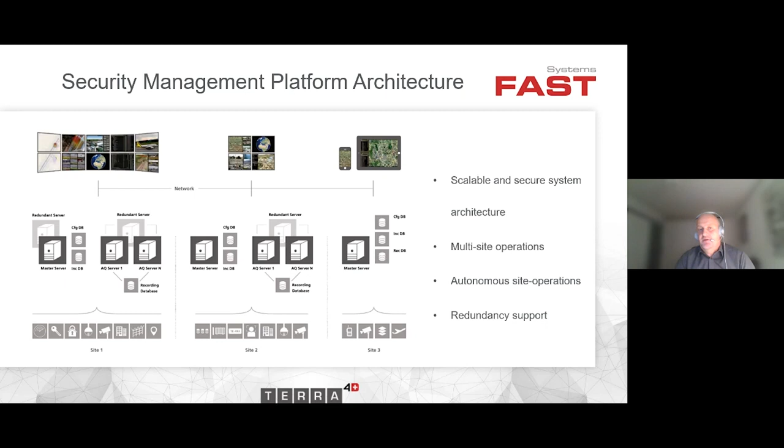We have a lot of great capabilities and features in our platform. My colleague Carsten Schritter will show you this in just 2 or 3 minutes. And something that is really outstanding or differentiating compared to competitive solutions is the georeferenced video, including augmented reality.

We also introduced a big data AI module 2 years ago. That means we have an engine that is continuously crawling the recorded metadata for unusual patterns in order to make the system really smart.

We also have workflow and interactive incident reporting. And since last year, we are actually compliant to an ISO standard, meaning we are able to put into our system already available standard operational procedures, or design new operating procedures, and of course quickly enhance and change these workflow procedures in case something is changing.

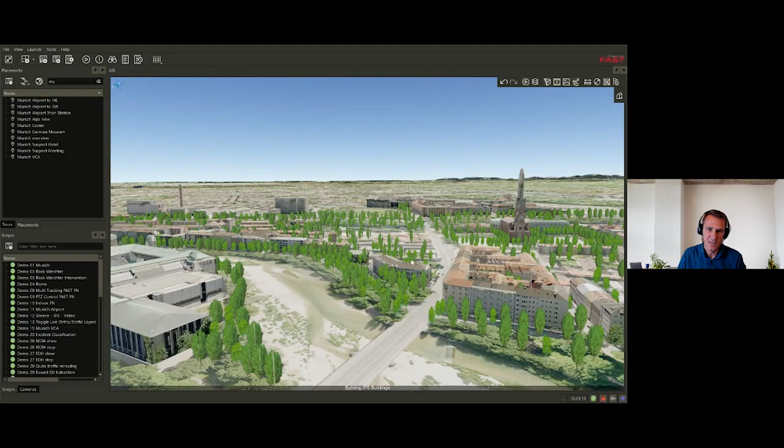So we have in this configuration several scenarios which are coming from projects. For sure, we are using either recorded sequences from the project or just demo data. The first sequence shows a flight into the city of Munich. We are seeing the buildings coming up. We have some vegetation - this is what you know from advanced GIS systems.

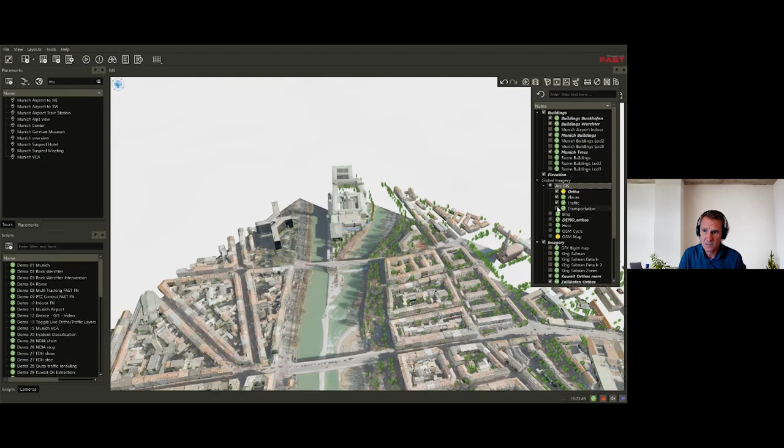We can also switch to other layers, like an OpenStreetMap layer, Bing, or ArcGIS layers, whatever is available in the projects. So the GIS layers can also be a mix of data located on your premise, on your server, or online layers. Especially when it comes to information like live traffic information, which I can show here as well, then we need a live layer.

This takes some time. We are getting this from our ArcGIS server, and after some time, you get here the live traffic information as an additional layer on top of the satellite imagery.

Beside this, we have, for example, the 3D buildings, which are a static layer on our server. This is regarding the GIS model, so these are more or less the static GIS layers.

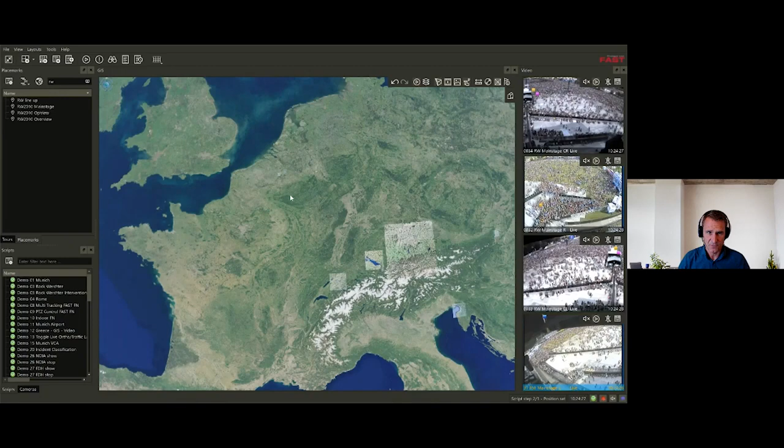Now we are flying into one project example, which is a music festival in Belgium, a crowd event. We immediately get situational awareness. We have the main stage, and we have an integration in this project with video surveillance and Tetra radio devices of police and medical units.

So the cameras are mounted in the 3D model. The video is projected directly into the 3D model, or you can see this in the traditional 2D view on the right side.

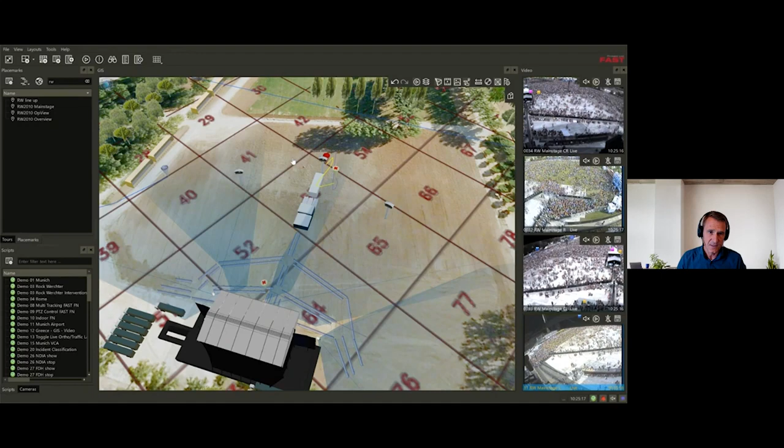You can also turn off the video, and then you see the tracks and the current position of the recorded units in the system for the police and medical units. So you have situational awareness - you understand where your units are.

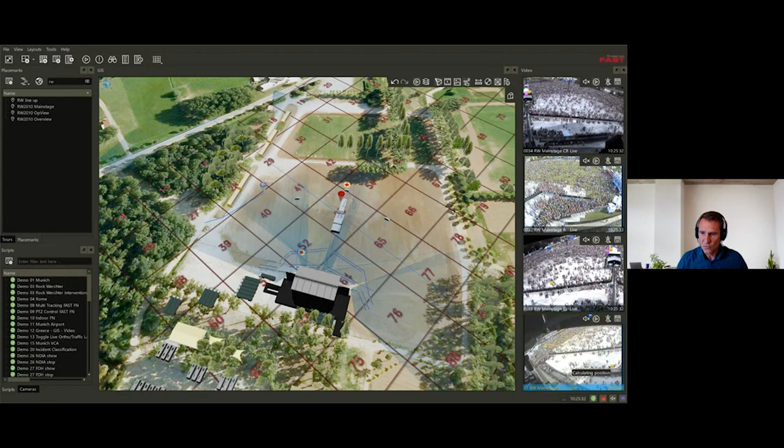You also, when you move the mouse over the video - and I do this in the lower right corner of the image - you get for every video pixel the longitude and latitude. This is what we call georeferenced video.

This means with a simple click in the video, the map flies to the location and marks it on the map. So we have a relation between a video pixel and the 3D GIS, the real world location.

Why is this important? I will show you an example directly exported from this project. So we see here other surveillance cameras, and we have the map view here on top.

One use case here was that the operator was looking at the video and can now trigger an incident directly from the video in the background. Remember, for this fireplace the young guys are doing, we have the coordinates based on our georeferenced video, so we can create now an intervention.

This means we want to send security forces to the incident location. So now we have triggered the start of this workflow for this intervention for the operator. The location is marked on the map.

I can now start my intervention, select the closest units, which I cannot do now because I don't have live units there in the field. So I go to the next step in my workflow, and we are simulating now that security forces are approaching the location, which we did in this project live.

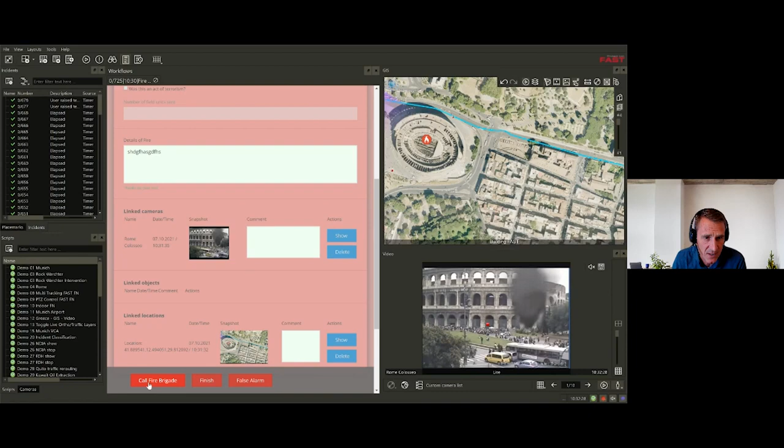So I started filling the incident report. Once I'm sure there is really a fire, I can call the fire brigade, which is for sure a serious action. So this means before I collected all the information, it's saved to my incident.

I call the fire brigade, and given that we have an interface to the fire brigade cars, we will see now the vehicles approaching the incident location.

So as an operator, I can just follow up, use my map navigation, keep an eye on the situation, and once everything is solved, I have now the option to finish my incident. So the situation is cleared and the system is switching back to normal surveillance mode.

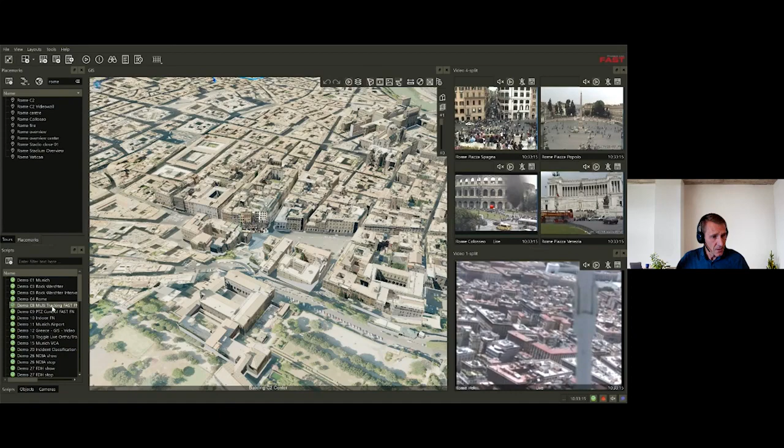So this was one other example. Now I'm switching to some live cameras we have at our office building in Germany. So far, these were stored sequences in the system.

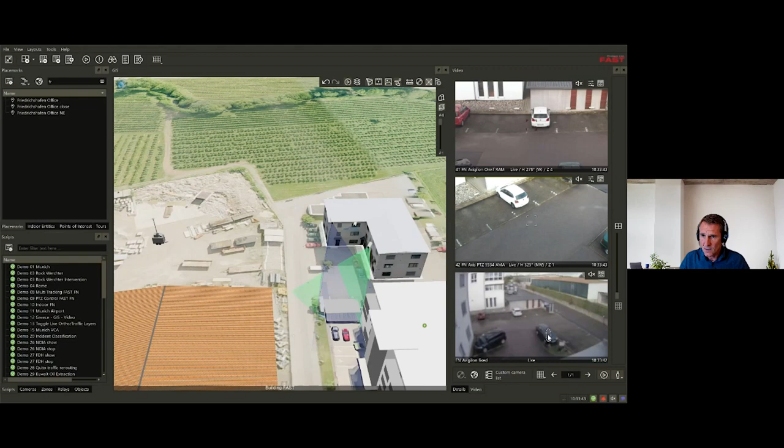So we see here on the right side 2 PTZ cameras and a fixed camera, and we have our office building where we see the mounting points for the cameras, the 3 cameras here at the building. So to give you an example here, how we control the PTZ cameras efficiently through the georeferenced approach.

I can use a fixed camera, click on an object in the image, like for example this car, and both PTZ cameras will center on the car. I can use a zoom rectangle to zoom to the number plate of the car, and I can read the number plate.

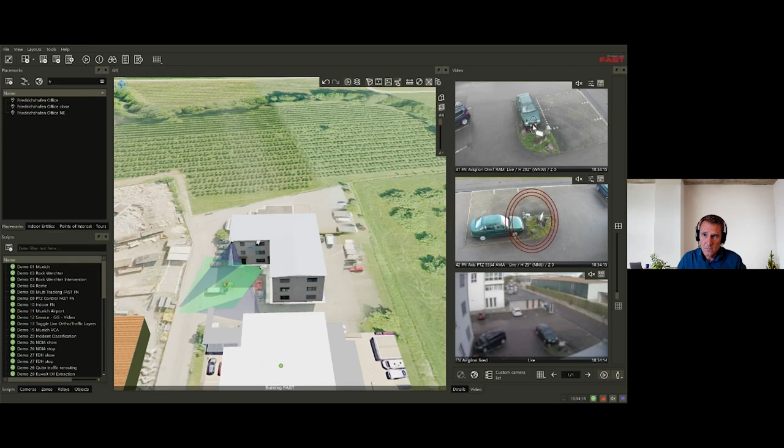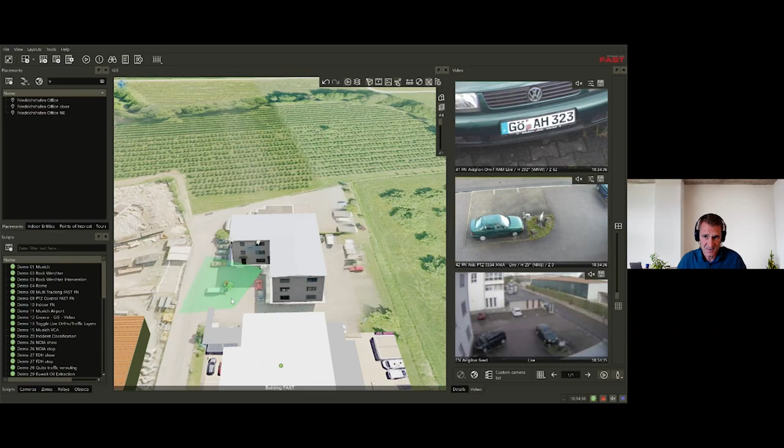Sorry, this was maybe a bit fast. And this is what we call latency compensated PTZ camera control, because what we are doing in the background is we send longitude, latitude to our georeferenced PTZ camera, and the camera is going to this object.

This is even more on the map, by the way. You see that the field of view of the cameras is changing. So when I use the zoom, for example, then I get a narrower field of view for this PTZ camera.

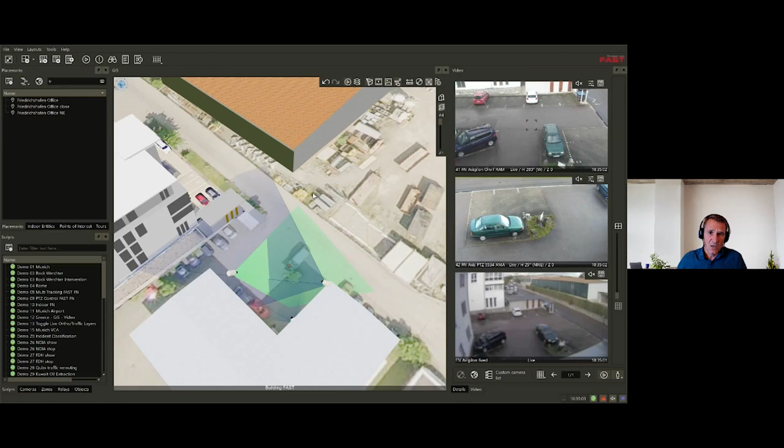And I can use also the map to center the camera onto different targets. So I use, for example, the multi-control on the map function for the PTZ cameras. Now I can click the corner of this building. Both cameras immediately go onto the target, and in the video you get the target centered to the camera.

So especially when you have wide area network connections, maybe to remote sites, this is very helpful, because you just tell the camera the target coordinate and then you wait for the image. You don't have to use a joystick, which is complicated when you have more than, let's say, 300 to 400 milliseconds of latency in your video.

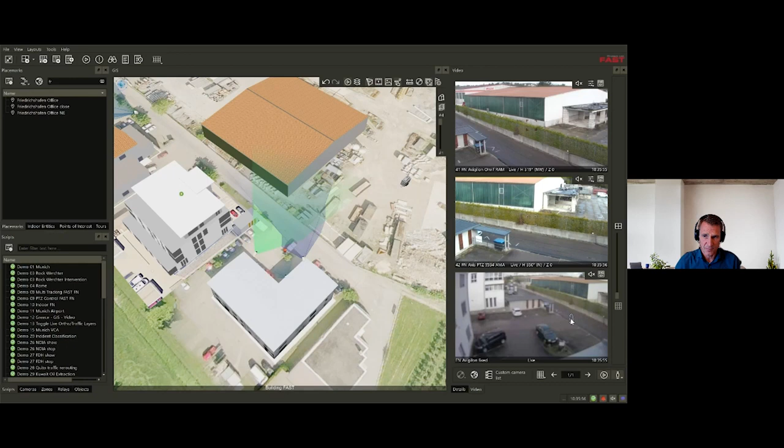And for sure, also for the PTZ cameras, I get the longitude and latitude for the video pixels, and I can do all the operations we did before with the city of Rome example.

Now let's go inside the building. So far we have seen outdoor applications, and I want to show you now some insides of the building.

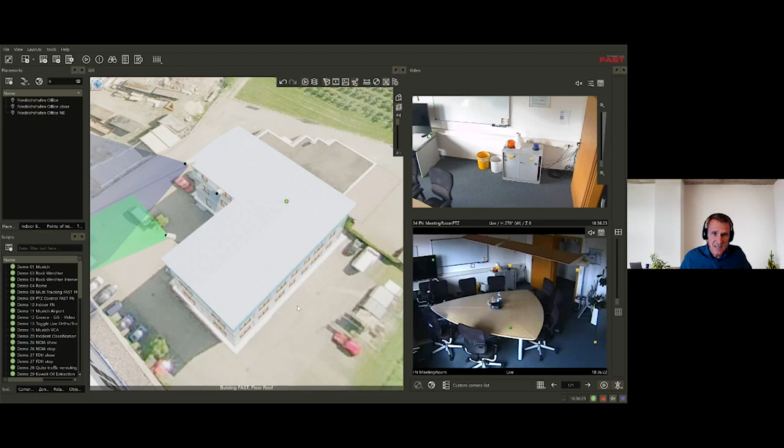So we have two cameras now on the right side, which are showing our meeting room. I can use here, for example, the building slider to open and close the building floor by floor to see the devices which are in the different floors. You see we have some smoke detectors here, a fire extinguisher device, and the two cameras in the meeting room. These are the cameras we see on the right side now.

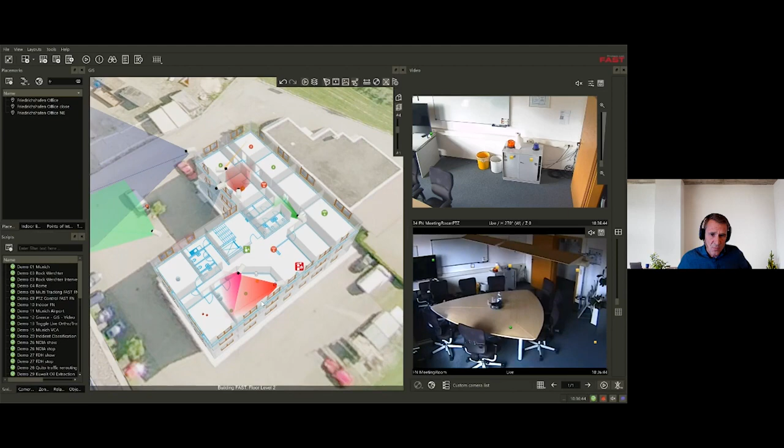In this room, I have some features coming from a building management system. For example, I can trigger the room light. I can do this directly in the video, because this is the augmented reality view, as Bernd mentioned in his presentation. So all the items which are in the current field of view of a camera are automatically displayed as an augmented reality view in the camera.

So I can trigger the room light, and I get now the feedback in the camera that the room light was turned on. The same I can do from the map. I have here the orange flashlight. I switch it on, I get the feedback immediately with the icon. And in the video, you see the flashing light here. Obviously, we have some delay in the video for the PTZ camera. Now it's coming, but the picture rate is relatively low.

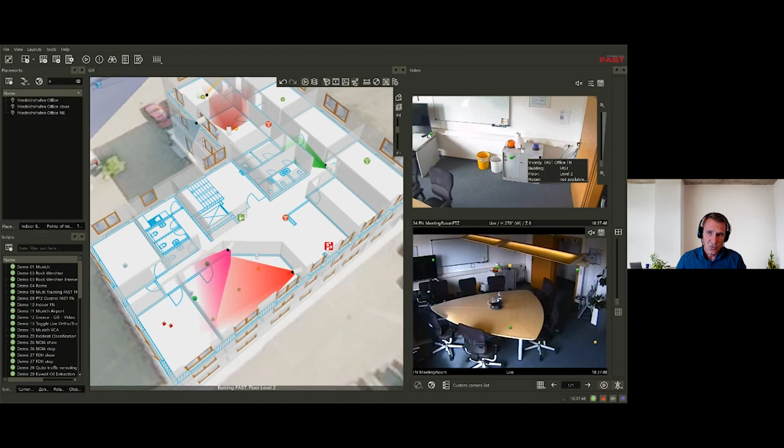So it's quite easy for the operator to control all the items from the video overlay or from the map. It's up to his decision. I can turn off the field of view of the cameras to have a better visibility on the icons. Switch off the room light.

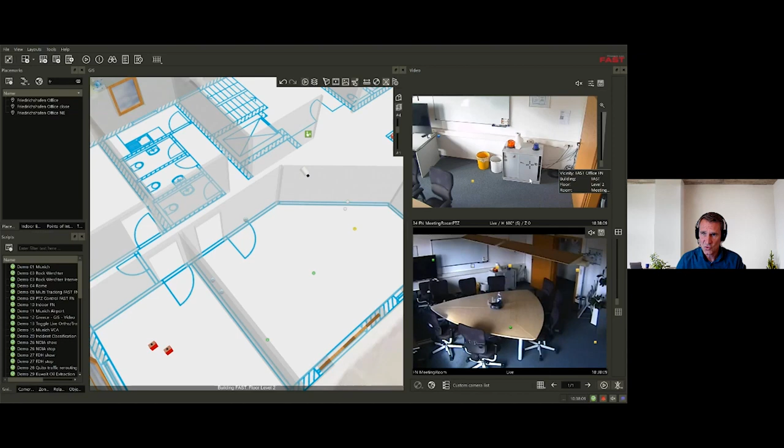The preset positions for my PTZ cameras are also showing all the items which are in line of sight of the PTZ camera. So you don't need to program. The pink one here is my PTZ camera. You don't need to program all the presets. When you have an I/O device or an access control point, a card reader or something in line of sight of the camera, then it will automatically pop up here in the preset list.

And when I go to the orange flashlight, for example, the camera will go to this location and you have it centered to your camera. So this is quite helpful in terms of saving work during the configuration.

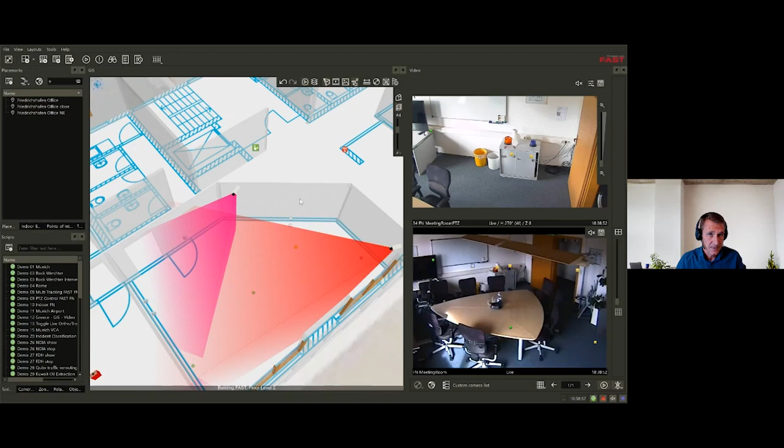Yeah, this was for the building. Then I'm switching to the next scenario, a totally different application, which is border protection. So we are talking about airborne surveillance now, and the fact that we have a 3D GIS system is very important there, because when we look at mobile cameras in general, not only airborne, also cameras mounted to vehicles, for example, or UAVs, then it becomes very important to understand what we see in the video image.

I think this application is clear, and it's quite simple for the operator. He has the visualization on the screen, and we are defining the workflows of the different actions he can take. But he has, in this case, the very important situational awareness.

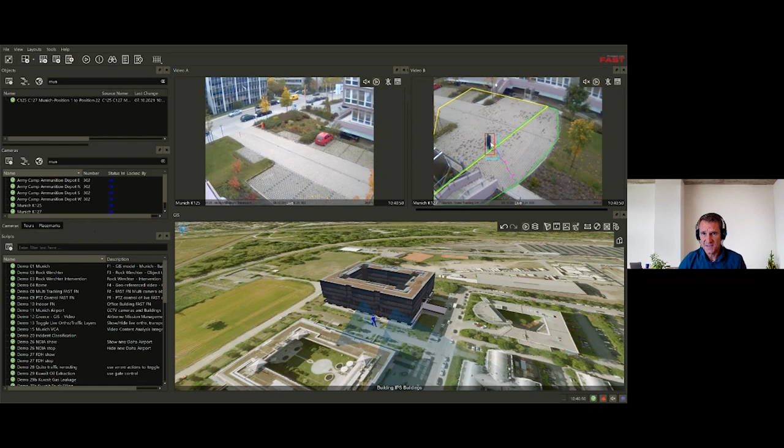How do we integrate with video content analysis? It was mentioned before that video systems nowadays provide this, it's quite a standard. So here we have, for example, a basic moving object detection. This is the video we see here. We have the overlay in the video for the moving object. And based on our georeferenced approach, we can project the object to the 3D map, and we have the historical track.

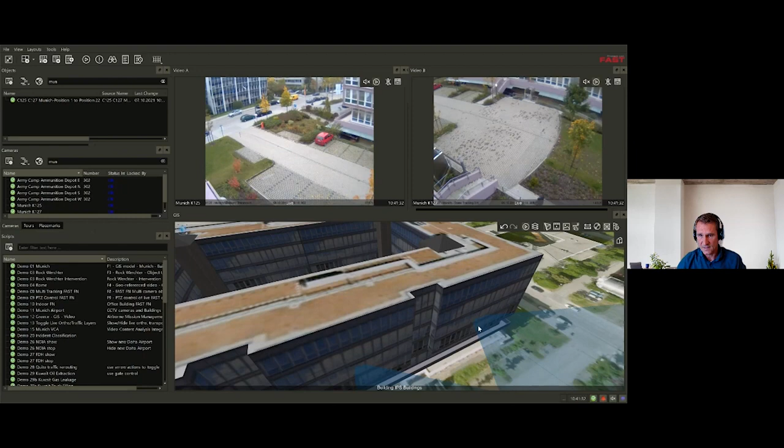And now what we are adding to the video analytics is, for example, that our system understands there are two cameras close to each other. The object disappears in the first camera, appears in the next one. The timing and the location fits to our thresholds, so we can continue the two objects from the two different cameras as one object in our system. So the operator gets at the perimeter, for example, only one alarm for an intrusion and not two from two different cameras which are not related to each other.

This is another example of what we can do with the system. Now I'm coming to a field related to integration of SCADA systems - a critical facility, an oil extraction site in the desert of Kuwait.

We have here the visualization of gates and road bollards. You can use the items on the map to open the gate, to pull up the road bollard. So the operator always has the visualization on the map and understands immediately what the situation is.

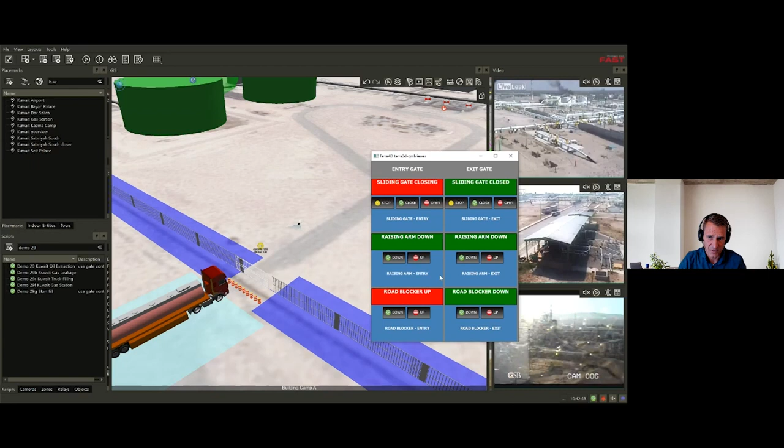We can provide the guard at the gate a simplified application, giving him on a tablet only the features he needs as a gate guard. This means he can also close the gate. The operator in the command and control center sees this on his client - this would be another client on a tablet, for example - or he pulls down the road bollards.

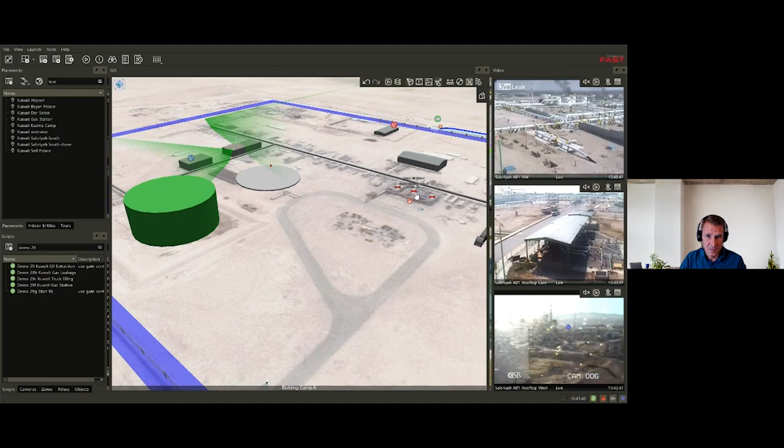Same here with the SCADA system - we have different valves, for example to empty an oil tank. This is how we can visualize this on the map, activate or deactivate different valves. This can go along with a SCADA user interface where you have more functions, and some important functions like a general ESD shutdown in this project are available through our system, because this is relevant for alarm handling, for example.

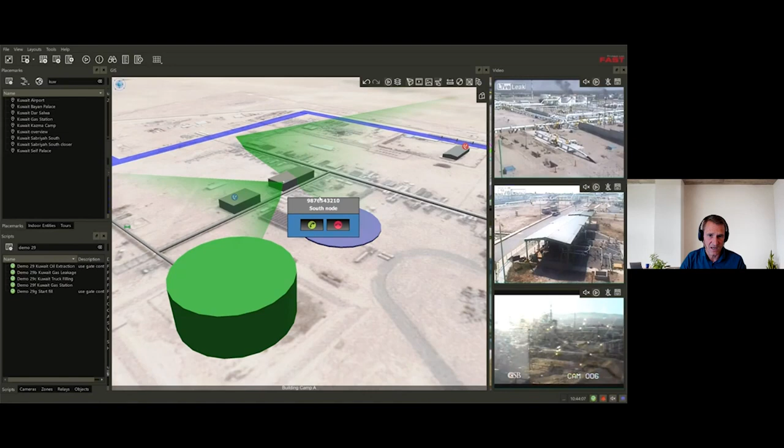Also what we see here are devices from a voice over IP system. So there's maybe a guard you can call in this location from the command and control center. Instead of scrolling through contact lists, you'll find an icon on your map - you can call the guard. The system has the number in the background or the ID of the device and starts a simple call dialog, so you can start the call, finish the call, and use your headset.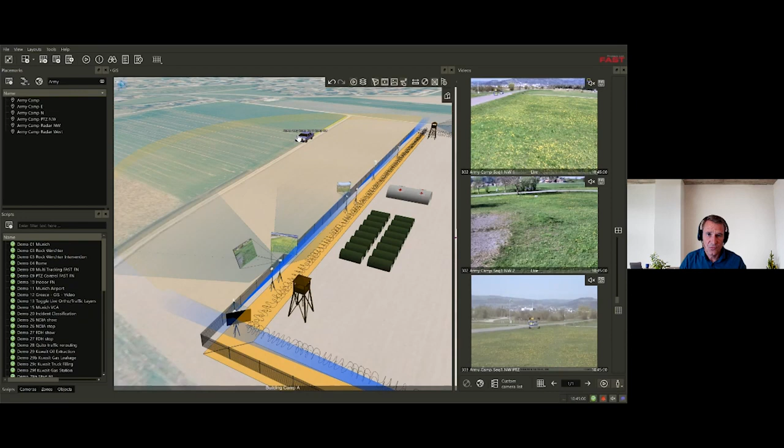We do the same, for example, for drone UAV defense projects. The radar detects the object, and we use other sensors to verify the objects before the operator can take actions.

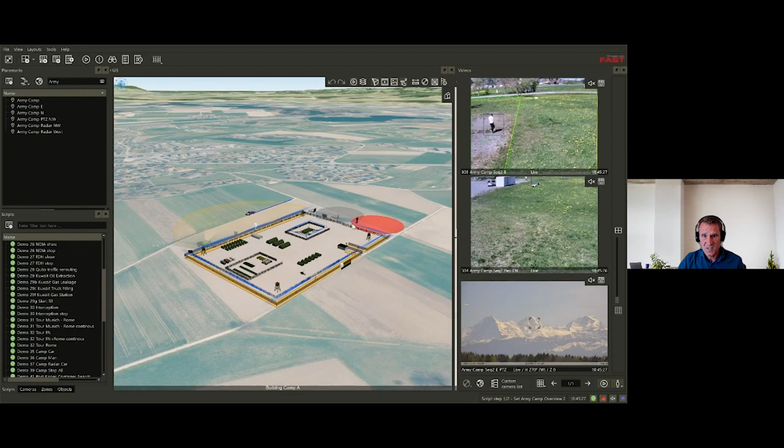On the other side of this perimeter we have a seismic sensor. As you know, the seismic sensor only gives us an indication that there is something - sometimes you have a rough location - but we're utilizing now video object detection, moving object detection, to get the exact position, and then we use this exact position for a PTZ camera to follow the object.

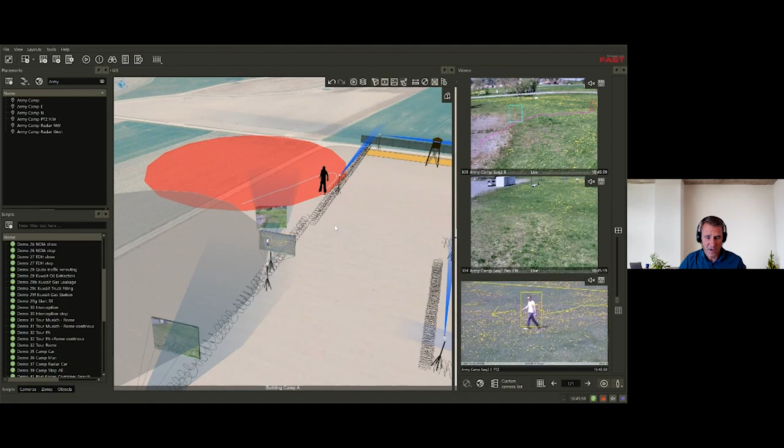You can see how this is visualized. So the power of our system actually comes when you have different types of sensors - we can combine the information, reduce the number of alarms, sometimes false alarms, by combining information which belongs together. This is mainly based on time and location, but sometimes also on object classification - the size of the object, or is it a vehicle or a human being, that kind of stuff.

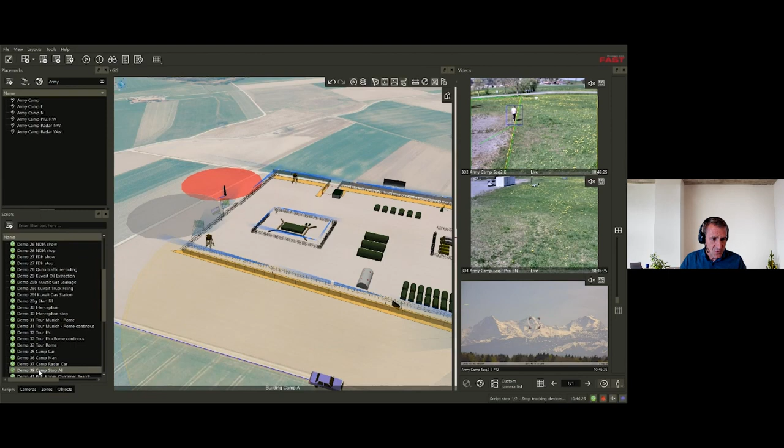So this was it from my part. I'm glad to listen to your questions, and we can go into one or the other scenario again to elaborate more deeply. I touched on a few points, different topics, and I'm looking forward to your questions.